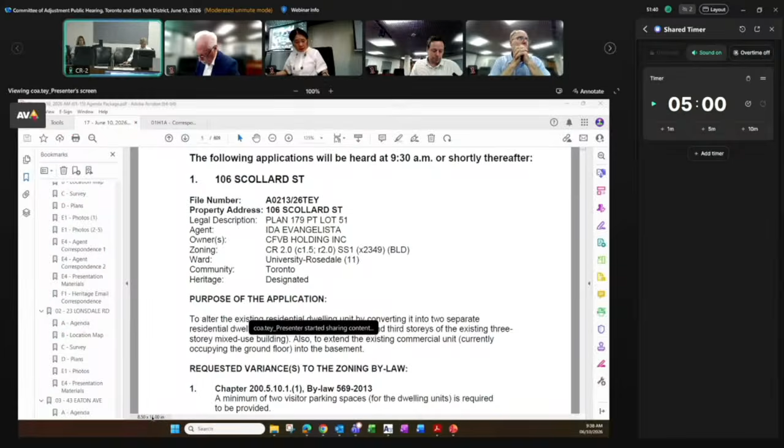106 Scollard Street. This is to alter an existing residential dwelling by converting it into 2 separate residential dwelling units, which will occupy the second and third story of the existing 3-story mixed-use building. Also to extend the existing commercial unit on the ground floor into the basement. We received a copy of survey, site plan, floor plans, elevations, 5 photographs, and email correspondence from the agent, and presentation material from the agent. We also received comments from heritage planning and transportation engineering. This is all the material we have received.

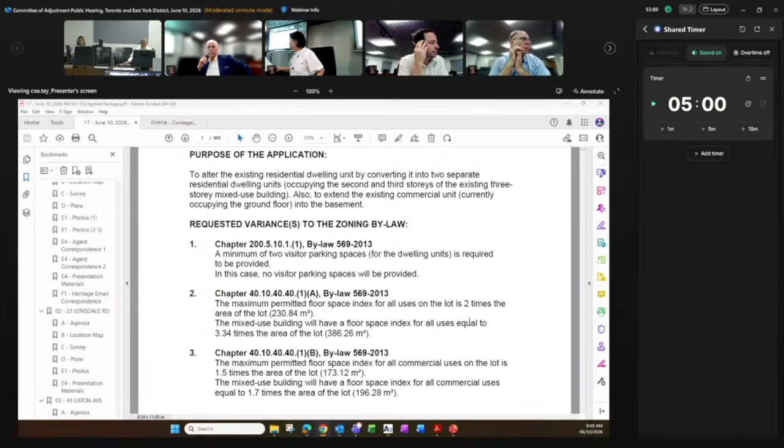We are ready for the applicant or the agent, please. Item number 1. Through you, Madam Chair, we have the agent online, but we lost him. I'll try reaching out to the agent again. You try one more time, otherwise we'll move on. I think it's a woman, Miss Ida Evangelista. We'll try one more time, and then we'll move to the next item.

Please leave your name and number after the tone, and I will call you as soon as possible.

We're going to move to item number 2, which is 23 Lonsdale. The purpose of this application is to alter the existing 2-story semi-detached dwelling by constructing a front 2-story addition above the existing garage, and also to replace the existing rear deck with a new covered deck and stairs, including new stairs for the basement walkout.

We received a survey, site plan, floor plan, elevations, 5 photographs, and also presentation material. We have no comment from any other sources. Okay, we are ready for the applicant.

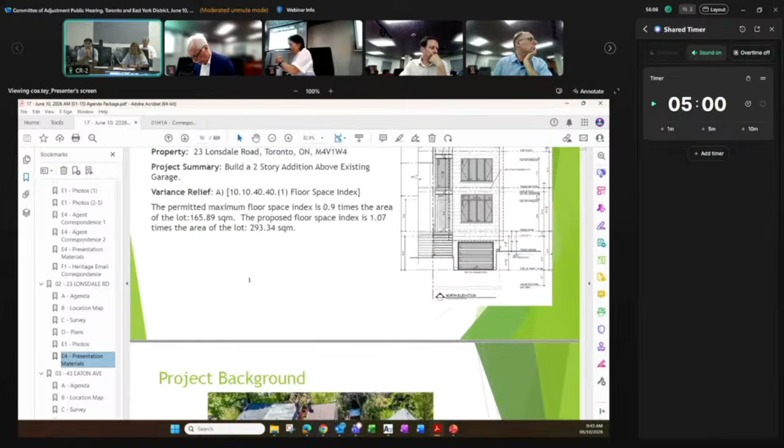In your presentation material, slide number 4, you show a graphic showing next door, the attached semi. Is that simply done to show symmetry? Correct, because my neighbor is building also the same 2-story addition above the garage. So I just want to say that I'm keeping the line the same.

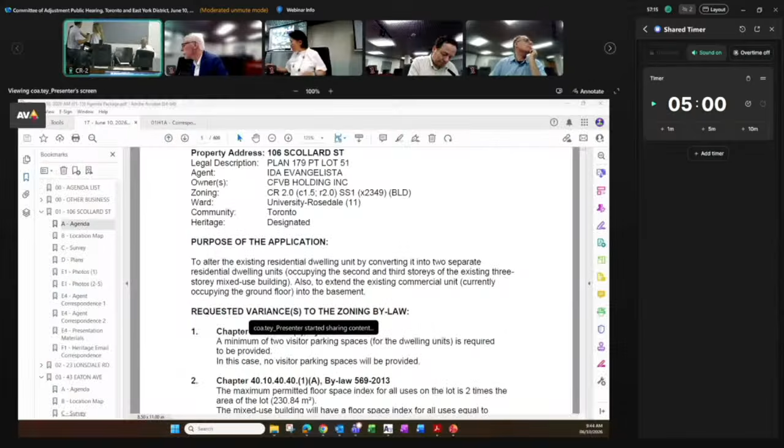106 Scollard Street, yeah. Ida, you have been unmuted. Thank you, good morning Madam Chair, members. My apologies, my computer just decided to crash on me. So it happens, we understand. Okay, so we are ready for you.

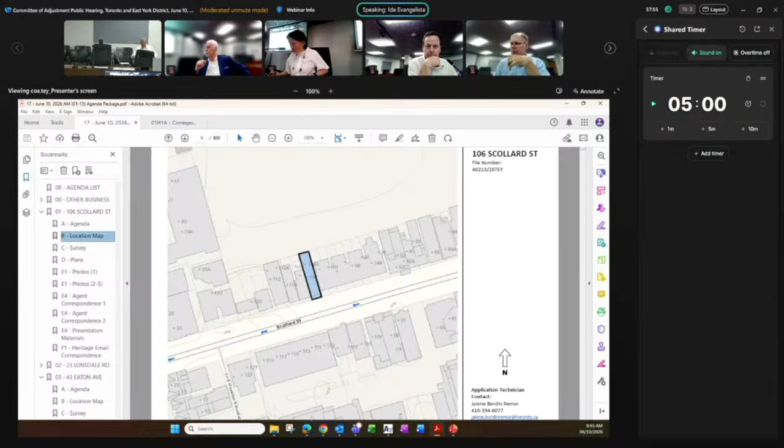Please tell us your application. Give us your address, name and address please. Absolutely, Madam Chair. Ida Evangelista, 53 Bentworth Avenue, Toronto. Okay, thank you. And I'm here on behalf of the owners of 106 Scollard Street.

Yeah, and I do not believe there's any opposition. So do you want to address the panel for any other issues before? Do we need a presentation? No? We might have questions. Do you mind if we just move into questions?

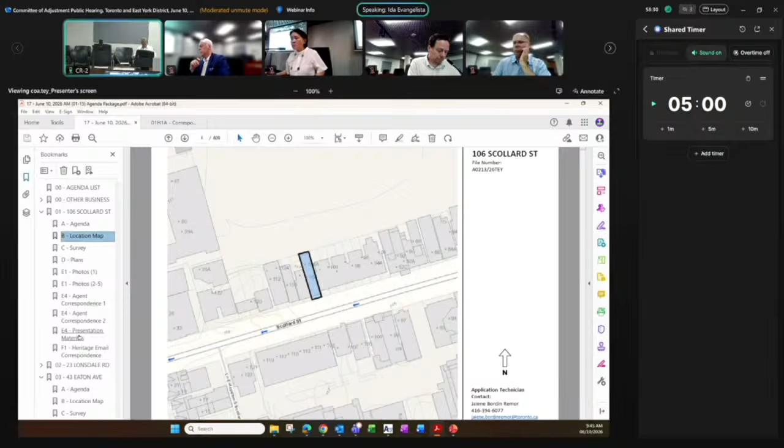Yeah, this is very straightforward. There was a fire next door, from, I believe, 92 to 104 caught fire. The structure remains as is, but due to water damage, we've had to gut the interior of 106, but I'm open to any questions that you may have.

Yes, we do have a question here. Mr. Weed, yeah. Just a minor question of clarification. At the end of the plans, the four plans labeled A2,

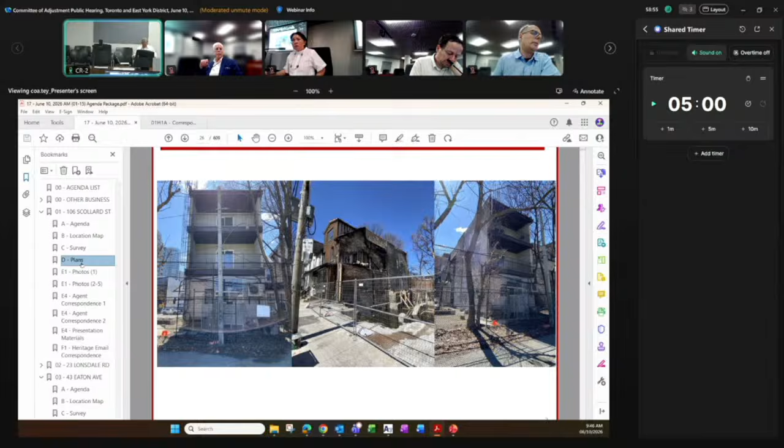they seem to indicate a single unit, but I'm assuming that's a superseded plan and we're going with the ones that are earlier on in the presentation. Is that correct? Through you, Madam Chair, member, the plans from A2 are old plans dating back to 2001. It wasn't quite clear, the application wasn't quite clear to some staff, so they asked if we can include some of the older plans. But the newer plans are from 411 to, I believe, 414. I just wanted to make sure that was clarified before we go forward. Thanks, okay.

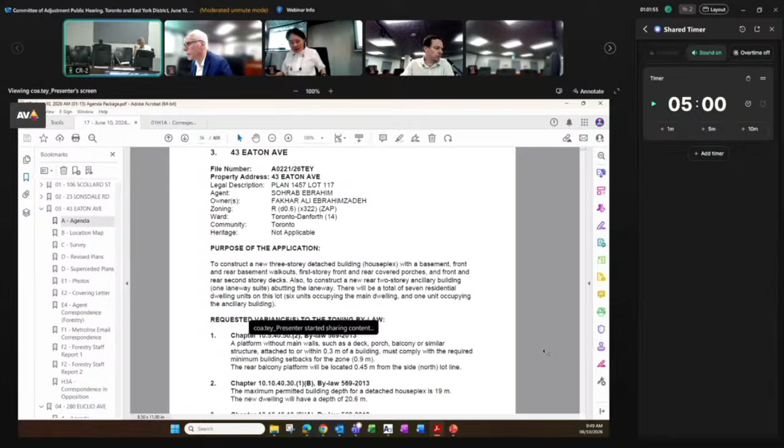Item number 3 is 43 Eaton Avenue. This is to construct a new 3-story detached dwelling, which is a houseplex with a basement, front and rear basement walkouts, and first floor front and rear covered porches, and front and rear second-story deck, and also to construct a new 2-story ancillary building, which is going to be a laneway suite. There will be a total of 7 residential dwelling units on this lot, 6 in the main building and 1 in the ancillary building.

We have received a copy of survey site plan, floor plans, elevations, and revised site plan, floor plan, and elevations, and 5 photographs and cover letter and correspondence from the agent. We also have received comments from Metrolinx and from Urban Forestry. We received opposition from 51A Eaton Avenue. And that's all the material we have received.

Thank you. Well, we're ready for the agent or the applicant. Through you, Madam Chair, we have the agent online and a couple of speakers in interest and opposition online.

Good morning, Madam Chair and members of the committee. My name is Sohrab Ebrahim from Barhouse Architects, 33 Lanark Avenue, and I'm an agent and architect for this project. I'll be happy to explain anything on the file. So do you want me to give a brief, or do you want to go ahead with some questions about it?

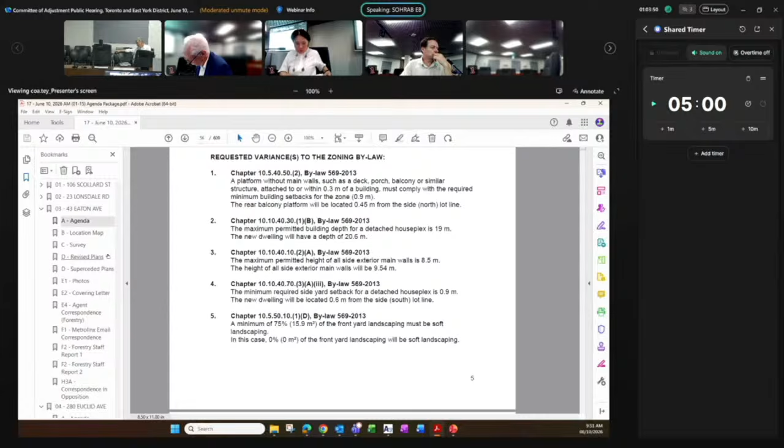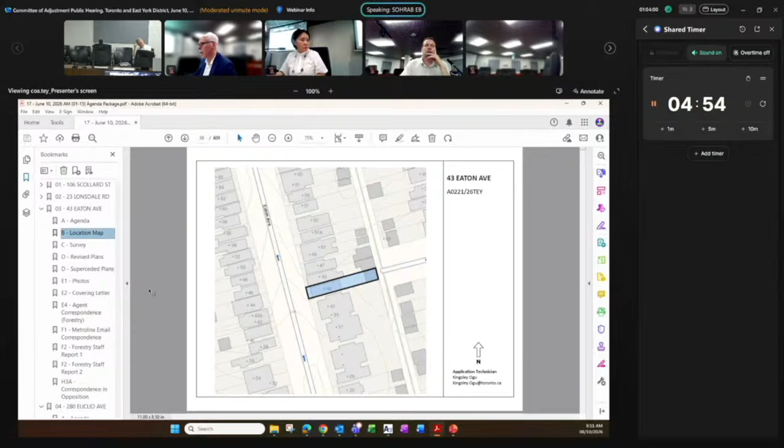So it was a very tough weekend for us because we received some surprising news that the survey was not showing the correct size of the large tree in the front. But we were able to look into it and communicate with the forestry. Unfortunately, we missed the deadline to submit the new drawings and proposals. But I have confirmation from the owner to confirm some of the improved numbers. And the good news is that we were able to improve the design totally in all aspects, including the front yard, the length of the building, and the backyard.

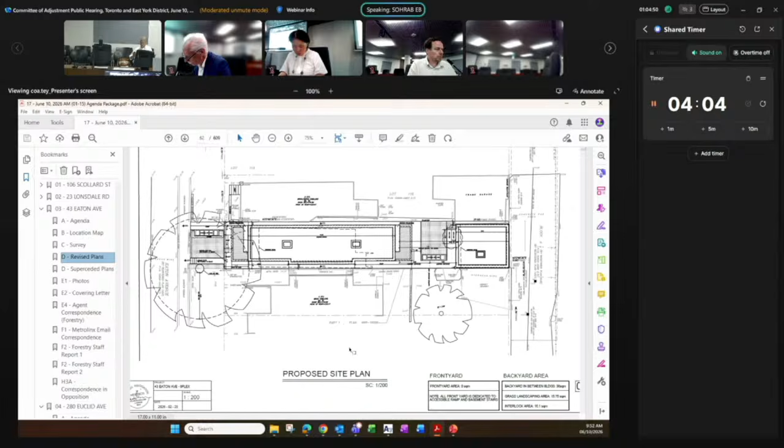So the number one change in this project is that we have reduced the number of units for the sixplex in the front from 6 to 4. So now we have only 4 units in the building sitting in the front. That gives us the opportunity to shrink the size of the basement units and the upper floor units as well. These are not totally connected with each other, so it's really tricky, and we have several options to play with, but we need to go one step at a time for each option.

So basically, the first impact of reducing the number of units is that we will not need the space occupied in the front yard for the garbage bins. Can you go back to the previous slide that shows... now go down to the one that... Yep, so this is the current basement.

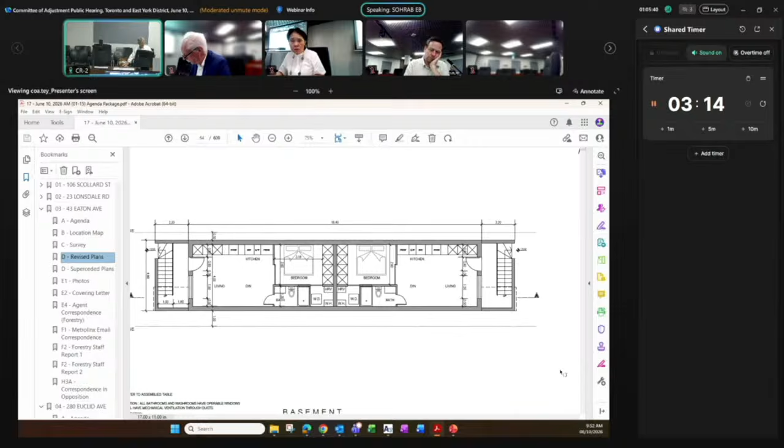What we are changing after the committee is that we are switching to a 2-bedroom unit here. We will shrink the walkout in the backyard. That will give us plenty of additional green space for the backyard. And if you please go to the site plan as well, and zoom into the front yard, please.

So you see the dedicated space for the garbage bins on the left side. We are able to remove that from the design because we have a dedicated space in the backyard, which is sufficient for supporting a total of 5 units now instead of 7 units. That will add green space to the front yard. The existing front yard landscaping is not much different, honestly, from what we have proposed here.

But we are looking into options to increase the landscaping in the front yard. The minimum that I can confirm in this session is a 0.6 meter shift back of the building, so we will have more front setback in the improved building design. That will add additional space in our front yard. As you see, the current proposed front yard is all taken up by pathways, and they're fully functional. We didn't have any space left named as front yard, so we were lacking some green space there.

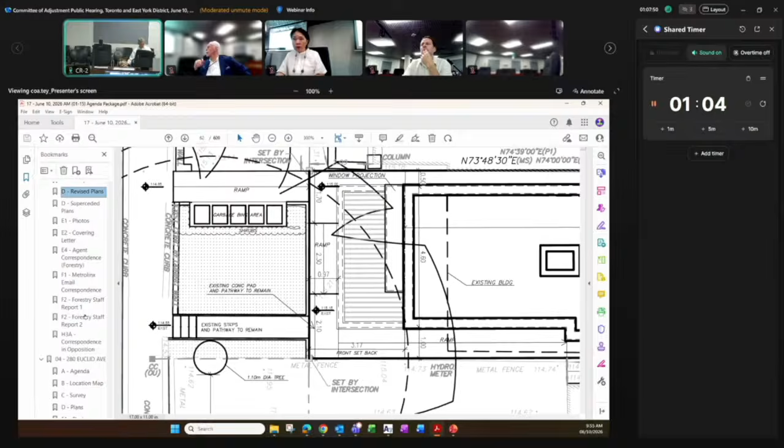Okay, you said one more minute. Do you? That's it, you're done.

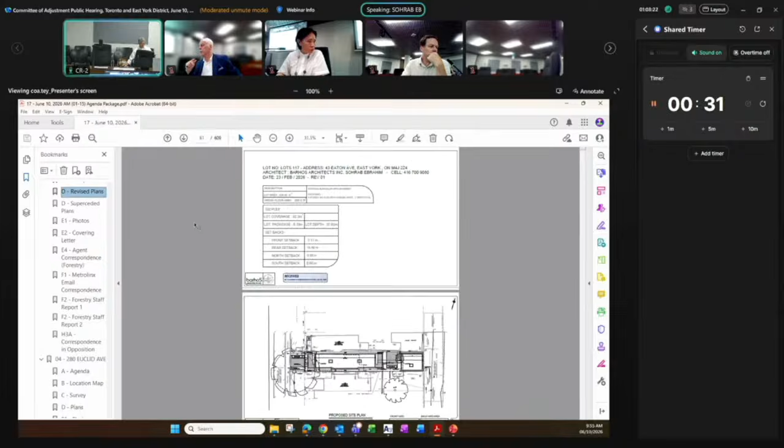One quick item about the back lane unit - we tried to push it to the limits of the property, but Toronto Hydro wasn't able to provide a power upgrade from the front yard. They're going to provide it from the back lane instead. So we're taking as much as possible for now, but we know later on we'll need to dedicate something as a trench going to hydro. That's why we're pushing everything to the site limits.

Okay, thank you. Before we start, any questions - I'd like to know, are you going to revise the purpose clause since you're reducing the number of units?

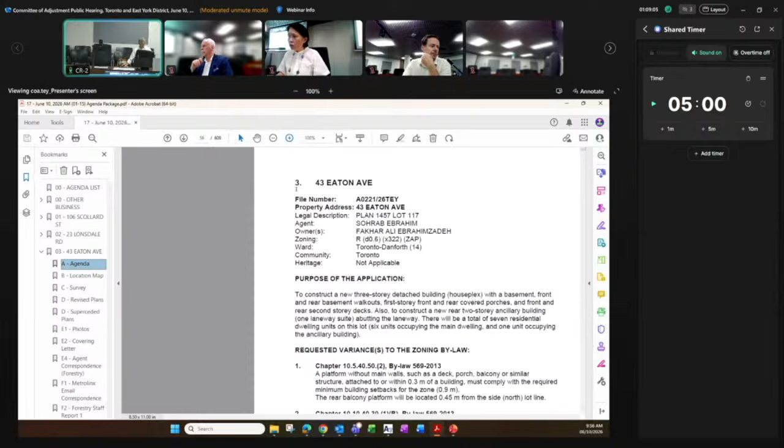Yes, we are reducing the number of units from total 7 to 5. Four will be in the main building and one in the auxiliary building. The purpose clause will be revised to reflect a total of 5 units.

The second question before we start - are all these changes reflected on the revised plans in terms of building envelope and setbacks?

We missed the submission deadline last week, so it wasn't submitted to the committee. But the building envelope and all the setbacks shown on this site plan are accurate - the current site setbacks will remain the same.

Okay, another question - you said you've removed or relocated the garbage bin locations, but the current site plan still shows one at the City Boulevard and some in the backyard. Will that change any of the variances in front of us? Not really - it improves the landscaping in front. The one currently shown is the backyard garbage area, which remains and is sufficient to service 5 units.

Okay, but will this affect the rear yard soft landscape variance? We will improve it - the basement walkout will be reduced by 0.8 meters, and that will be added to the landscaping in the backyard.

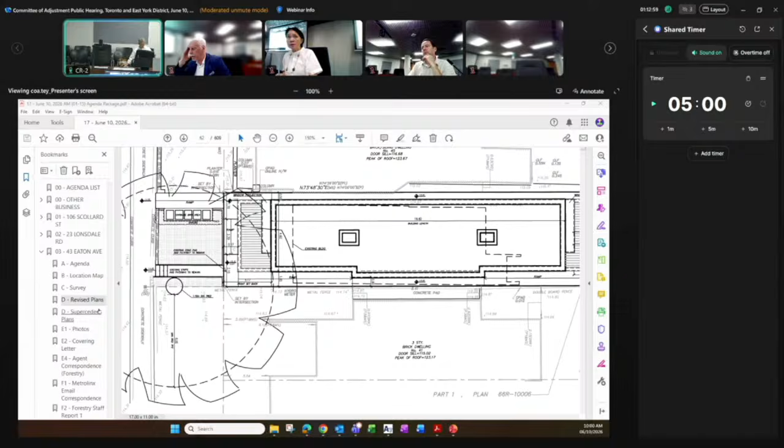I'm uncomfortable looking at the proposed plan, which is not the most recent site plan and elevation drawing. So let's give it to questions for the applicant. One last question - are you aware that Urban Forestry has recommended refusal of variance number 5?

Yes, and we send them the updated drawing. Item number 5 is regarding the landscaping in the front yard. The landscaping hasn't changed much from the existing. If you see the survey, the front yard is all covered with concrete pads, so we haven't changed much, maybe a bit. All the proposed areas are fully functional - it's nothing to do with aesthetics of the building. There were some ramps and concrete paths. If you check the survey, you'll see the existing front yard is mostly covered with concrete. Yes, I was out to the site, I know what it looks like in the front.

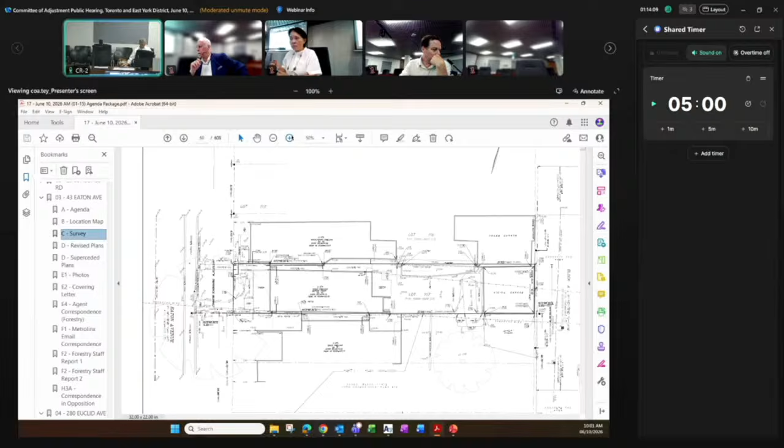Okay, thank you Madam Chair. Thank you, yeah please. I'll save my comments for when we're in committee. When we're in committee, wait till we comment. Okay, questions? Peter, any questions?

No, just similar to Dino's point. It seems like some of these variances are going to change, and we don't know the numbers yet. So to the applicant, if they can give us the actual numbers of the changes to the variances before we hear from the neighbors. Just like what I asked about the soft landscaping, I think it's good to have a number, because otherwise they will revert to this 17%.

Okay, let's have a discussion, and then we go back to the applicant with our decision, whether to defer or whether to go ahead.

I think from the perspective of transparency and accountability, I echo what Mr. Lombardi said - I'm not comfortable with this. I don't have the right numbers in front of me, I find it to be confusing. I actually agreed with Forestry's recommendation. I also saw the initial proposal as zero sum - yes, we'll get increased density, but having zero soft landscaping weighs one against the other. Moreover, the lack of transparency here, I'm just not comfortable with. So I would not support this, or I would support a deferral.

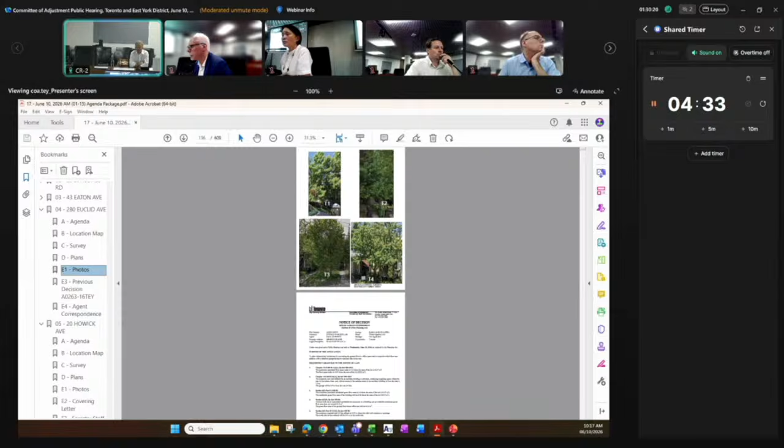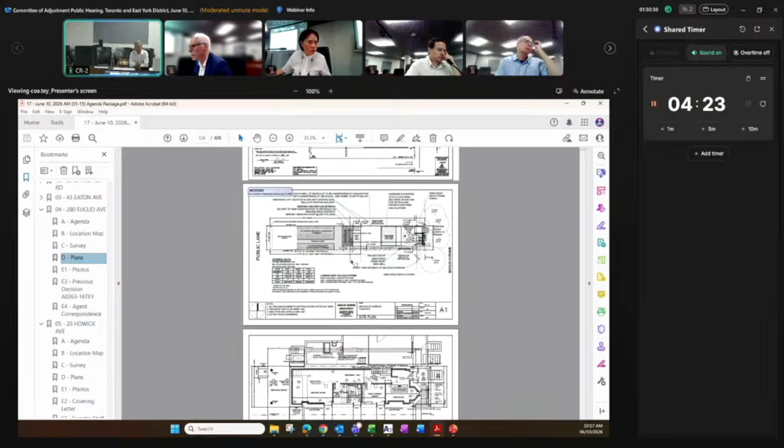So this is around Bathurst and College, Bathurst and Dundas. These are very tight, old properties, narrow frontages. So in coming for the minor variances to rebuild the front porch, 2 variances are triggered by that activity. One is a kind of somewhat complicated front yard setback exemption - that means if you can meet the side yard setback, you can project a front porch into the front yard setback a certain amount. But because this detached house has a 0 lot setback, any projection cannot take advantage of that provision, so that is variance 1. The second one is pretty easy to figure out: on this tight little property, the existing deck takes up almost all of the front yard, so the new deck, by adding a building code compliant stairway to the basement, reduces the front yard soft landscaping.

And in fact, the plan examiner stated it as 0, which I'm fine with. But on my drawings, I indicate that there's 1.2 square meters, like a little wafer of grass could be left. So she may have... I never really questioned how they calculate their numbers, so I just took it as the 0 she assigned. I'm happy to answer any questions.

As far as I knew this morning on the AIC, there were no staff comments from planning or even forestry. There are no neighbors so far.

There's one person who may be of some interest, but I don't know whether this person is going to speak or not. Is he going to? Yeah, hi there, can you hear me? Okay, so there's a speaker. Are you finished? Yeah, that's my presentation. We'll hear what he said, and then we'll get back to you. For sure. Okay, we're ready.

Madam Chair, we'll now hear from our next speaker from 278 Euclid Avenue.

Hi folks, my name is Ben Atkinson. I'm at 278, the property just south of 280. Just for general context, we have a good relationship with the neighbors, everything's generally fine, and we're supportive of the project. We've been away for a little while and just came back and saw the changes.

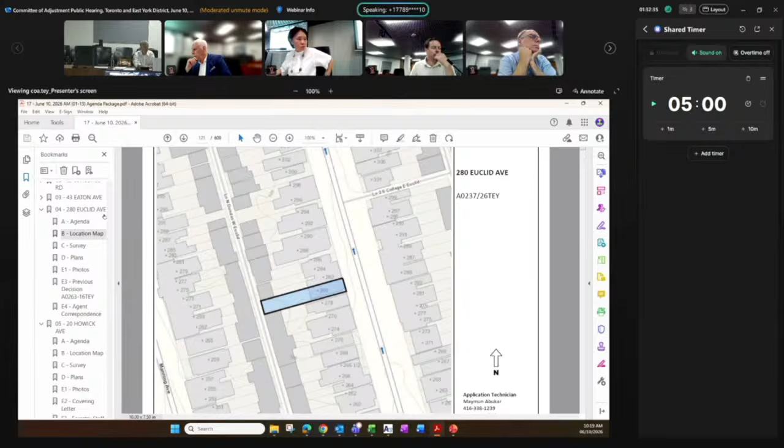I just had some clarity questions more than anything else. Angus, I think you already answered one of them - the variance for the 0% soft landscaping on the front yard was a little scary to us. We had some water start coming into our basement, whether related or unrelated, around the same time the project started next door. So any reduction in the soft landscaping in the front was a little unnerving to us. Good to hear that it sounds like there's still going to be quite a bit there.

We'd love to hear a little more about where the walkout is going to come, which direction it's going, and how much change there really is to the front. And then there's the first variance on it - again, not really in opposition, just looking for clarity. Is the front porch coming out any closer to the road, or is it just effectively rebuilding what it was?

It doesn't seem that they are doing anything in the front, but we can ask the question - the applicant can respond to that. Any question to this speaker?

Actually, I do have a question to you. Are you aware that they are proposing a rooftop rear deck? My question is, is that a very common feature we're aware of? Because we can see it, yeah. Yeah, it's a common feature in the area, right?

From what I can see, limited to what I can see off ours, there are a number of patios. This one looks like it's probably on the larger side in the neighborhood, but people build off the back - it's not the only one, there are a few of them. Not every house has that, but it's not an unusual feature, right? That's what I want to make sure. Yeah, no, I'd agree with that. This one maybe looks a little larger, but I'd agree.

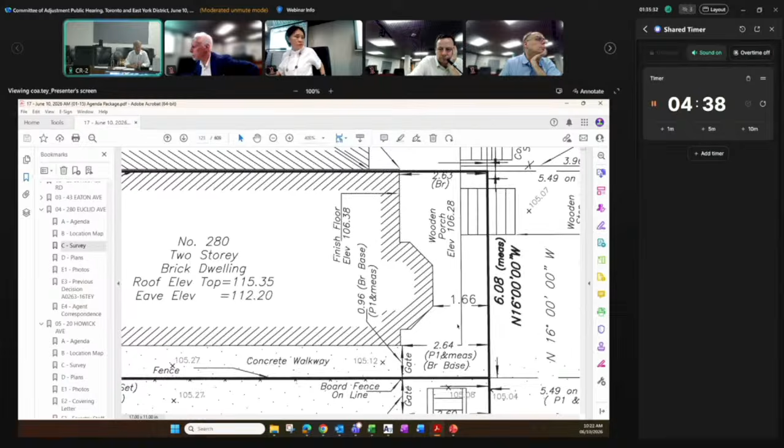A building permit was issued over a year ago for the rest of the project, including third floor decks and rear additions. There were no minor variances needed for that work. We're simply here for the porch. So to answer the neighbor's question, the porch is being taken down and rebuilt.

It's slightly closer to the street, maybe by about a foot than it is right now. These are difficult things to explain over an image and a phone call. I'd be happy to come by and walk them through it. I'll talk about the soft landscaping using the survey, and then show where the stairs come up.

As you can see, the dark line on that survey illustrates the property lines relative to the building. The building has that hatching on it. You see the bay window and the little steps coming down off the existing porch. Like all these properties, the owner of this property owns that much land, but in front of their property, between their property and the sidewalk, is a swath of right-of-way owned by the city that is green landscape space. That's why when you walk on these streets, the porches are pretty much right on the property line at the front, if not over, and then it's the city land that you think is actually the property's front yard, but it's not.

So in other words, that's a city-owned tree floating out in the boulevard there. Forestry's had no concerns about this because the porch is effectively being rebuilt in its same location. So in terms of the ability of the land, both on the property and in front of the property, to absorb rainwater, there's effectively no change. There's been a porch there for 100 and however many years, 40 years at this point probably, and the soft boulevard of the city is not being altered in any way because that's not our property. So that's the issue about the landscaping change.

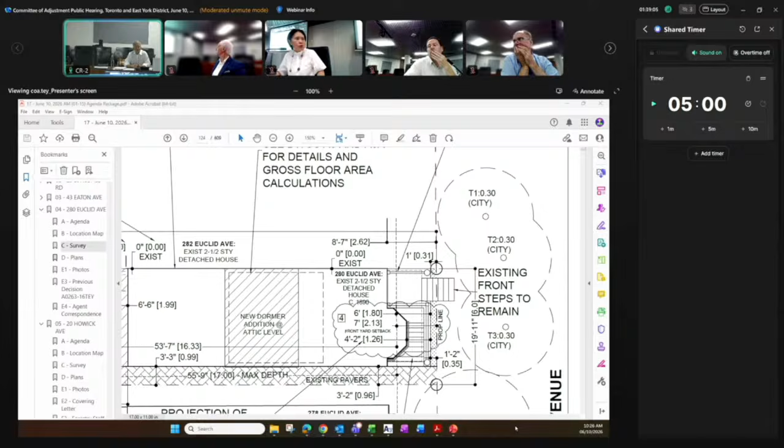So I'm going back to the rooftop deck. Is there any kind of concern about privacy? You're only proposing a guard, right? You're not proposing any higher fence. No, because this is the R zone, you're not limited to deck size in the R zone at all. I think about overlook. I guess the owners have lived there for many years, and it was chosen to simply put the deck up there with a normal building code compliant guardrail.

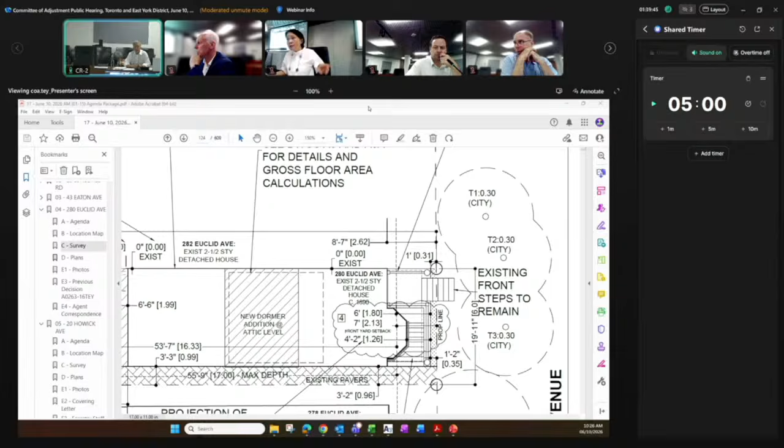And again, as I say, that permit was issued long ago. Okay. Any more questions? Now we don't have any more questions, no more speakers either. So we are back in committee now. Okay, please, Mr. Lombardi.

Thank you, Madam Chair. I think the applicant, Mr. Skeen, has done a good job explaining the two variances and how those variances translate to the site plan. My initial concern was with variance number 2, which reduces the requirement for front yard soft landscaping to 0. But in reality, as Mr. Skeen explained, there really is not much room between the front of the house and the front property line.

I don't see any opportunity to add additional soft landscaping, but there is landscaping in the boulevard. This is Little Italy neighborhood, an eclectic neighborhood with tight side yard setbacks and urban form. I think this is a modest application, and while many houses along this street have reduced soft yard landscaping in the front yard, I think it's consistent with what's existing on the street.

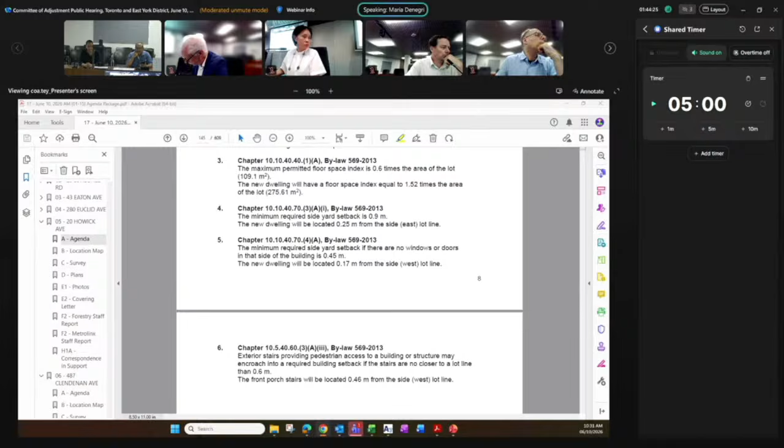The depth variance is really just because it's set back from neighbors, yes. I don't know if any of you had an opportunity to visit the site, but we can see from the plans, the existing house is a one-story shack really that has been set back excessively. So what we've done, our addition, though it's called a rear addition, is actually a front addition. We are building on the existing foundations and extending the house forward to better improve the streetscape.

I wanted to ask, would you be okay, because the rear sticks out quite far from the neighbors, and I really appreciate that you've got the third floor set back a little bit. Would you be okay if we tied the approval to the elevations just to lock in that setback? Yes, I think that's a thoughtful element, but I just want to lock that in. Okay, maybe we can hold our question. Let's listen to the people who are here first.

Please give us your name and address and tell us what. Yes, my name is Jorge Guajala. I'm the owner of 22 HOWICK Avenue in Toronto. Thank you for the opportunity to speak today. I'm here to express my concerns regarding the proposed redevelopment of 20 HOWICK Avenue, which is adjacent to my property on the east side. My home is located immediately on the west of the proposed development. Along the side of my house facing the proposed construction, I have 5 windows that provide natural light and ventilation to my home. The proposed 3-story dwelling is planned to be built extremely close to the shared property line, which raises several concerns regarding both the enjoyment and maintenance of my property.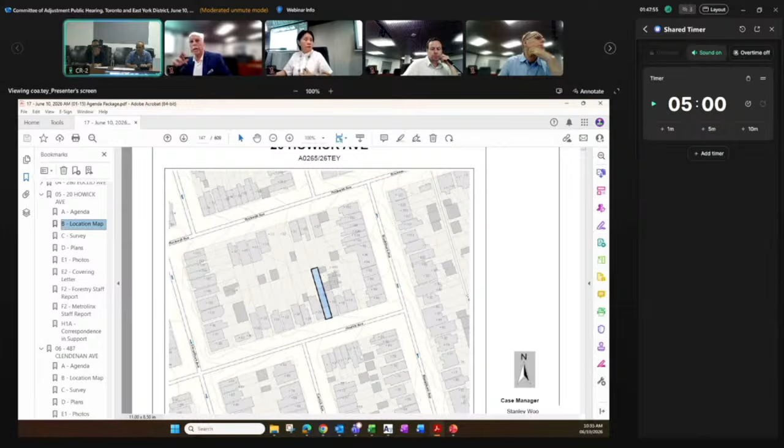Especially George Wahala, okay, thank you. Yeah, we do have some questions for you. Please go ahead. Thank you, Madam Chair. To the deputant, thank you for being here today, sir. Just a couple of questions.

Are you aware that the proposed renovation to the house, a rebuild, is using the existing foundation? Yes, I'm very aware of that. Okay, so they're not changing those setbacks?

According to the blueprints, the plans that I have, they plan to do 5 centimeters from the property line. This old house has been built for 80, 90 years. Back then they built it so close. Actually, number 20 is built about 4.5 inches from the property line, and so is my house, about 7 inches. So total is maybe 12.

I've been having a hard time using that little space to go into the backyard. I had to crawl, go sideways. And the proposal there, they want to continue almost flush to the foundation, which will leave me with the same tunnel view. All I'm asking is for zero setback change.

Sorry sir, I just asked a question if you're aware that they're using the foundation. Yes, I did, I am. And are you aware also that the depth at 21.12 meters is existing? So what I was saying is the bench.

The 4 feet, I'm happy that they're doing something to the house, it's beautiful, it's going to look good. My only concern is— No, you're not answering, you're just not confirming. Do you understand that the depth is existing? They're not changing the depth.

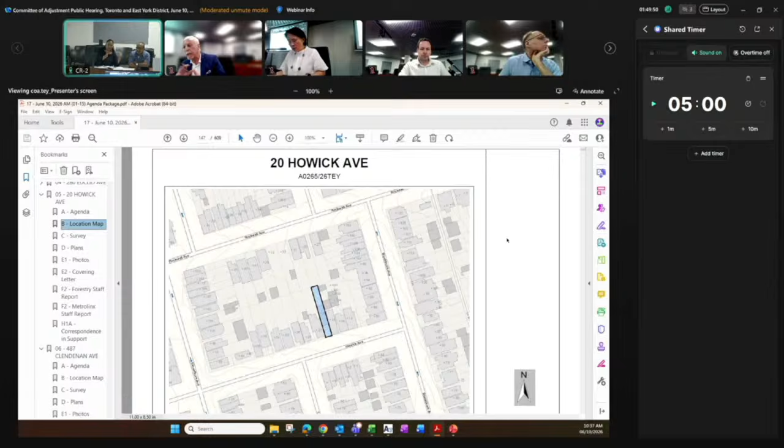The other question I have, you talk about the west side yard setback at 0.45 meters. You may not know that recently the provincial government has allowed a reduction in all setbacks to a lot line by 10%. So in fact, 0.45 meters would now be 0.405 meters. Not a big difference, but it is a difference. It's bigger than 0.17.

Okay, thank you. Any other more questions to these speakers? Okay, thank you. We don't have any more questions. No, I have a question.

No, okay, the house is made out of bricks, right? That foundation, but the deck is made out of wood and it's huge. Is that part of the foundation or not? We can get the agent to address that, because it's just our order. Otherwise, we are now bringing back the applicant and maybe address some of the issues that you just raised.

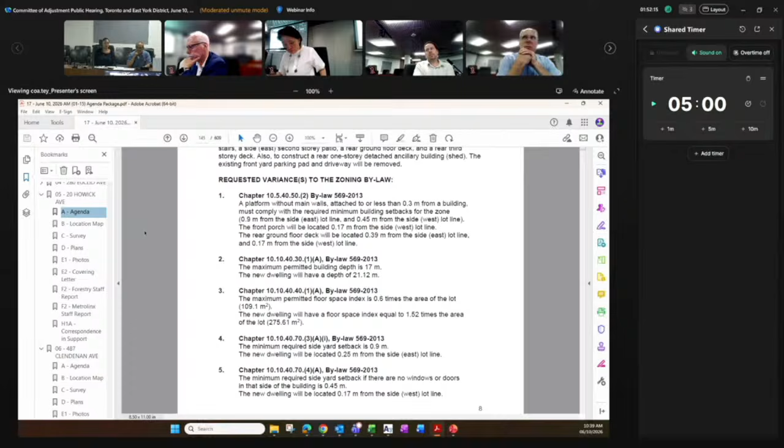Hello, can you hear me? Yes. So in terms of the full presentation, what I would be doing is essentially going through the points in my cover letter, which was submitted, and I believe all committee members have had a chance to read.

So what my cover letter does is essentially state the intent of the homeowners to build a house, a new build from the ground up, by using the existing foundations, which has been made quite clear. It is the use of the existing foundations that helps us address the complexity of building on a tight infill site.

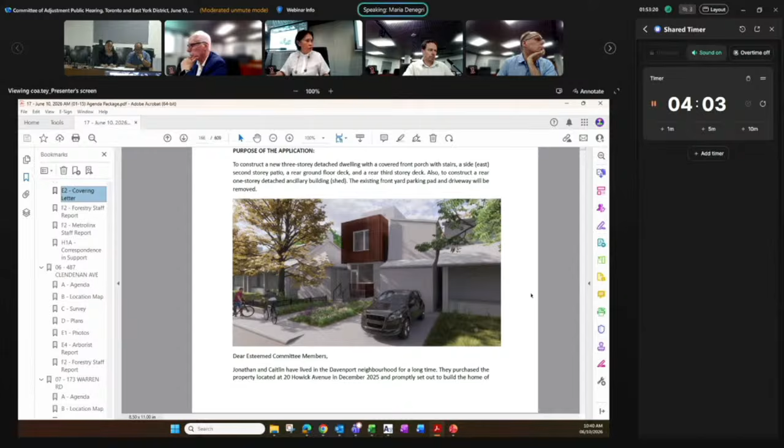It essentially generates a series of existing variances. To address the concerns of the setbacks, the house does extend the existing foundation walls forward. On the west side, which is the setback in question, we are extending an existing condition. On the east side, the existing condition is actually 0.25 meters.

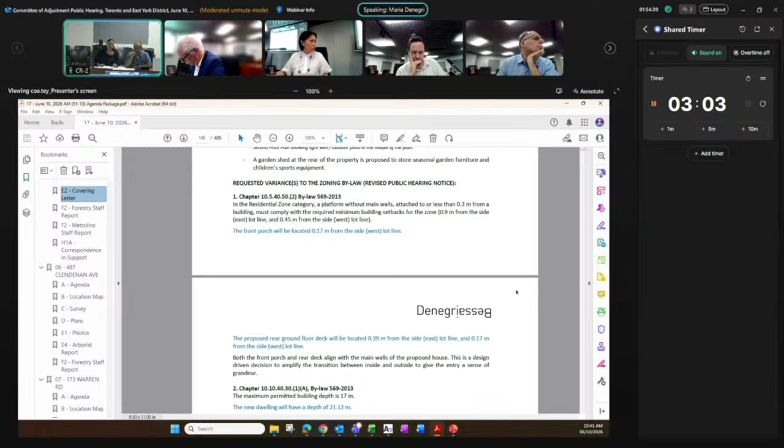But we have noticed there is a right-of-way of 0.3, so in our new build portion we actually comply with the right-of-way. Now, to answer the neighbor's question regarding the deck: no, the building depth is measured to the wall of the building, not to a platform without walls. So the deck is not part of the building depth calculation.

It extends beyond that. I think the concern about the setback has to do with the blocking of light. A platform at ground level, 18 inches off the ground, is not going to block any light on the neighboring property. If there are concerns about the depth, we could reduce the depth of that deck to get the homeowners down to the yard faster. But the rear deck is not a variance, so it's not one of the items listed here.

There is a screening wall on the west side of our porch. We could also remove that in order to allow a little bit more light to filter onto the neighbor's south wall.

But the other thing to note is, yes, all the houses on the street, most of them precede zoning bylaws. So the house next to us was built prior to zoning. There are windows on his side wall, but those windows today would not be allowed. So we don't really have anywhere to go other than up and extend the existing walls.

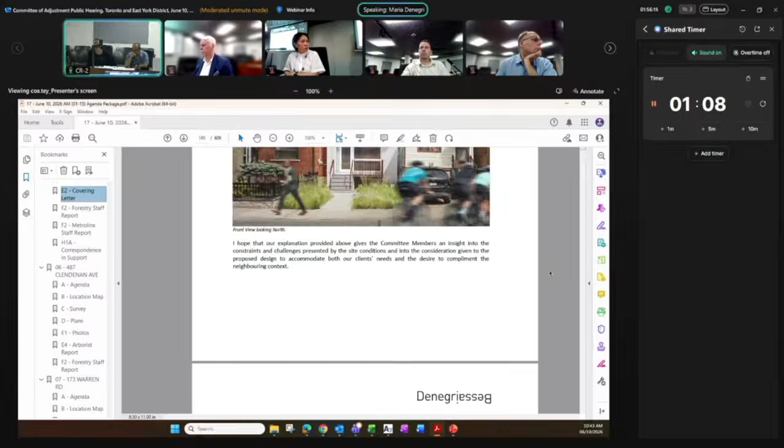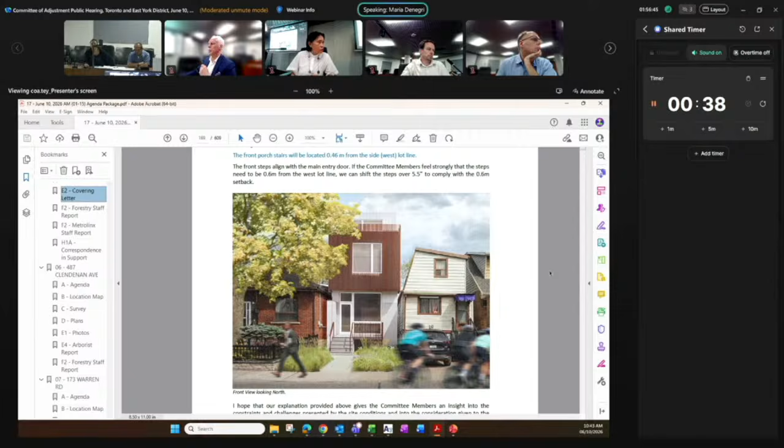The site is narrow, it poses challenges. I'm excited about the opportunity the owners have given me to resolve the challenge of building a family home on a narrow property. I think we've done so in a creative way, really trying to address the scale of the neighborhood by setting that third floor back considerably, so that from the street, the massing reads as 2 stories. I'll leave it at that — I'm sure there may be more questions I'm happy to answer.

Any questions? Yes, please. Just confirming, so even though you are building a front addition, you're still not going as far forward as the neighboring houses, right? So there's no breach of front yard setback, nothing.

Thanks. Yeah, the building depth is actually increased quite a lot, it's over — almost 4 meters over. But I have a question: looking at the site plan, you said you're using the existing foundation. It seems the front porch frame is actually slightly smaller than what you suggest.

I'm talking strictly about whether the foundation is a full foundation you can actually build on, or if it's just this frame part you'd have to rebuild with new foundations. The front deck is being removed — that front deck is not buildable. When I talk about existing foundations, I'm referring to the existing house, which has a masonry block foundation.

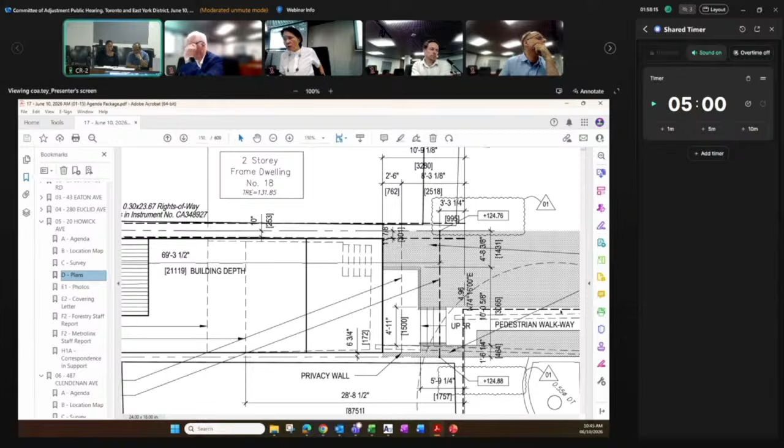Oh, so which — it is at the back? I think the front part is where the issue is. If you scroll the site plan on the screen, you'll see the notes with those arrowheads.

Yes, and that's what I see. I understand that part, but I think the issue was in the front. I was confused that you can actually build on top of that. You can't build on that deck, that frame foundation.

So the large wood frame deck in front of the house gets removed. The one-story construction above grade gets removed. We will be reinforcing the foundation wall with a bond beam around the perimeter and then building on top.

So it seems that the clearance between your house or proposed part and the neighbor to the north is about 20 inches, right? Like 10 inches from your side, 10 inches. So is that a safe width so no one will get stuck? I guess it is the existing width too, right? It is an existing width.

I have tried to take the narrowness of the property and set the house in. I'm also dealing with building code requirements, which is not something you consider in the context of committee of adjustment, but I have a minimum width of a staircase, a minimum width of a hallway, minimum dimensions required for bedrooms. And all of this combined.

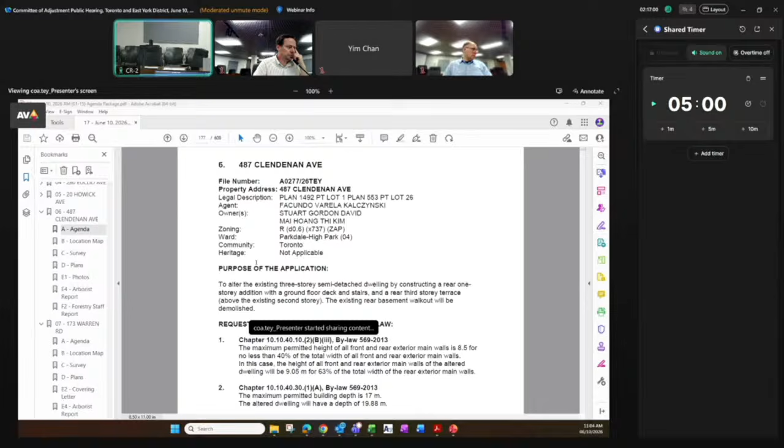As we resume, okay, the next item, item 6, is 487 Clendenan Avenue. This is to alter an existing 3-story semi-detached dwelling by constructing a rear 1-story addition with a ground floor deck and stairs and a rear 3rd floor terrace. The existing rear basement walkout will be demolished. We received a survey, site plan, floor plan, elevations, 4 photographs, and an arborist report from the agent.

We also received comment from Urban Forestry and one form of support from 489 Clendenan Avenue—it seems to be the next door neighbor. Okay, they're asking for just 2 variances. We are ready for the agent or the applicant. To you, Madam Chair, we have the agent online and no speakers for this item. Okay.

Hello, Madam Chair, my name is Facundo Varela, 103 The Queensway, Toronto, Ontario. Okay, yeah, I correct myself—they are seeking 3 variances. 3 variances, yeah, correct? Yes. Yeah, it seems that you do not have any oppositions.

I see our panel did a presentation. No, we do not need a presentation, but we do have questions. Please go ahead. One question to the applicant: are you providing privacy screening for the third-story terrace?

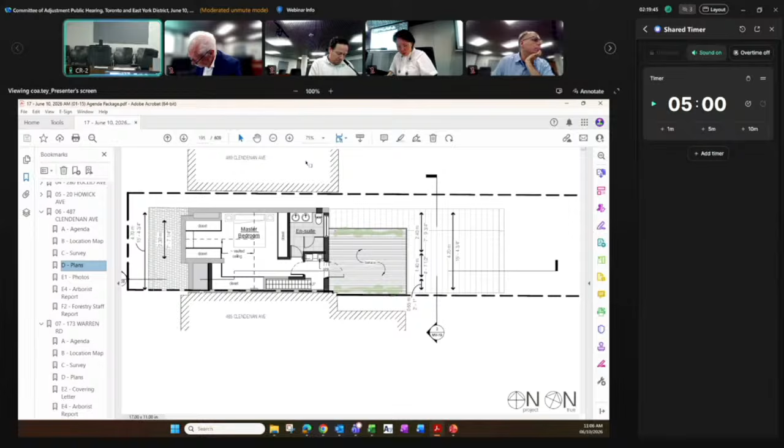Thanks, Chair. I think this is reasonable. The depth is significant compared to the neighbors, a couple meters in addition to what's permitted, but this is an extremely long lot. The backyard is over 120 feet deep, and they've sloped the roof nicely, so it has less impact on both neighbors. It's also limited to 1 story in height, which is an important element to lessen the impact of the depth variance.

The other variances being requested are minor, I believe. So I'm happy to move approval of this.

I'd like to tie it to the side elevations, both sides, and the site plan, just to capture the 1-story nature of that. Actually, let's say all elevations, because that'll capture the roof peak as well. And subject to the privacy screening we just discussed, and urban forestry condition 2.

There are 3 conditions. Who would like to second? All in favor? Unanimously approved, with 3 conditions. Thank you very much. The next item is item 7, 173 Warren Road.

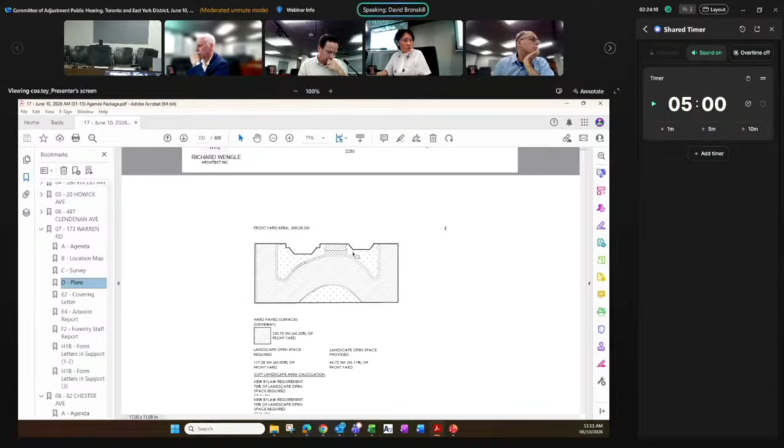Maybe the easiest way to demonstrate that is in the package we put together, the 8-page PDF showing the proposed changes in the front elevation, on the last page. Part of the genesis of this application is a change in... sorry, do you have our presentation there? I don't see it in our package, but maybe staff will have it. Let me try it a different way with the materials you have, to avoid taking too much time. I'm just seeing if there's an existing elevation I can show you.

The existing building on elevation 3, Madam Chair, really does appear as a 2.5-story. Part of this application is a change in architectural style to a Tudor style, and the front elevation has the sloped roof and dormers. The peak you see there in the elevation on the screen is being added as part of this process. So it's fair to say the existing is a 2.5-story, and with the 3-story addition it will ultimately be a 3-story house. It does help, yes, and the existing house is actually quite beautiful, but I see it's a Tudor style architectural design.

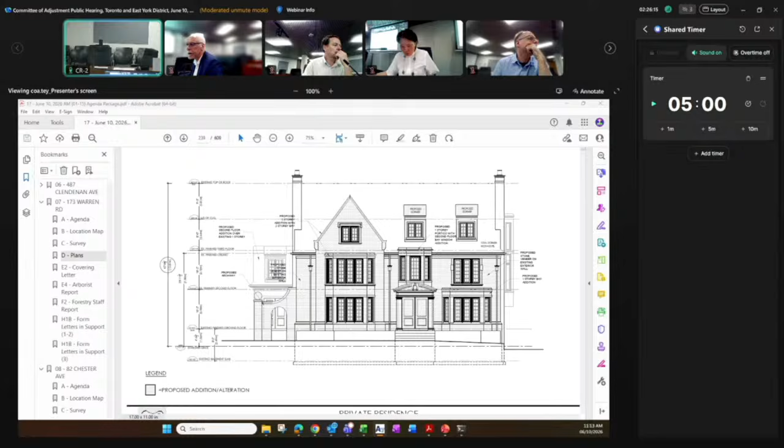All right, just another question. The variances that are troubling me are really 7 and 8. I think I understand why there are variances for both front yard and front yard soft landscaping. Can you explain, though, is that a result of the bay windows, the porch, et cetera?

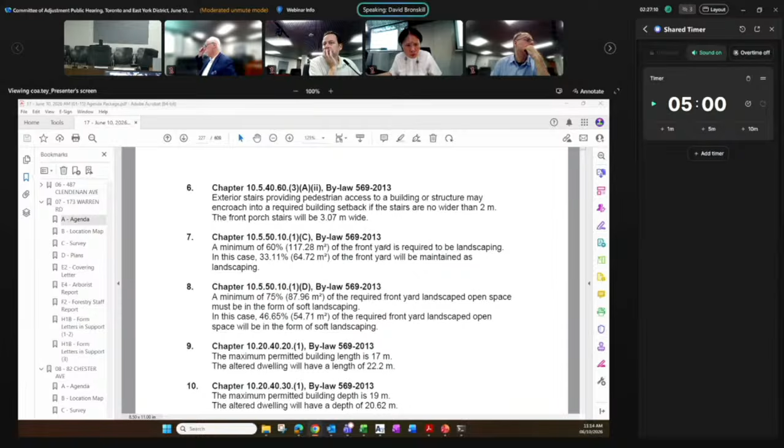Yeah, I can. Thank you, through you, Madam Chair. Those variances are actually the existing condition. No changes are proposed to the existing driveway area, the existing hard surfaces, or the existing front porch stair. However, because there are proposed changes to the front elevation, like the porticos being replaced, the bay windows, those then trigger the variances for that existing condition.

So what is there will stay the same, but the changes to the front elevation mean that variances 7 and 8 were added through the zoning examiner's process to be put in front of you. Okay, thank you. But you say that the part of existing is already under the required? Yes, those variances there, those percentages, that's what exists on the site today. Oh, okay. The bay window will not affect or take away some of this soft landscaping? Because it just triggers the variances themselves, but doesn't make the existing condition any worse. Because the bay windows do not have foundations, is that right? Correct.

All right, please, yeah. Just following up on that, I mean, there is a lot of driveway on this property. In the survey, it says that this bit at the north was a driveway. Is that already being converted, or is it being converted into more of a soft landscape area?

Through Madam Chair, I hate to ask a question of a question. Do you mean the area adjacent to the side? Yeah, exactly, that kind of leads to behind that little front wall of the extension of the house, on the north side. Let me just pull something up. Yeah, on the north side, it seems to be like, in the survey, that was a driveway too, but is that already being converted or is it planned to be converted? There's an archway that's proposed there.

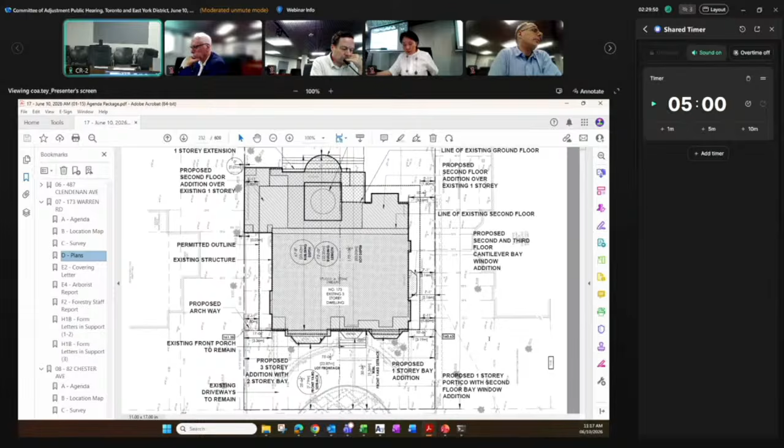I'm trying to see if perhaps, despite the enormous amount of driveway, some driveway is being removed elsewhere on the property, that's perhaps a compensation. I acknowledge that is occurring. Thank you for the question. Yes, okay, I can see whether it can increase some of that. So some of that's going to be now more of a walkway with some soft landscaping. Correct. Because it's a very good site and very large, and it should have some kind of opportunity to not make it worse in terms of soft landscaping. I thought, yeah, you're right.

Yeah, okay, all right, any other questions please? Maybe Mr. Bosco can advise the owner to improve that, reduce the size of the driveway or eliminate it and put it into a little walkway so it got more soft landscaping. Indeed, unless they want to park a car there. Well, they may be planning to do that.

So we do not have any more questions. We are in committee now.

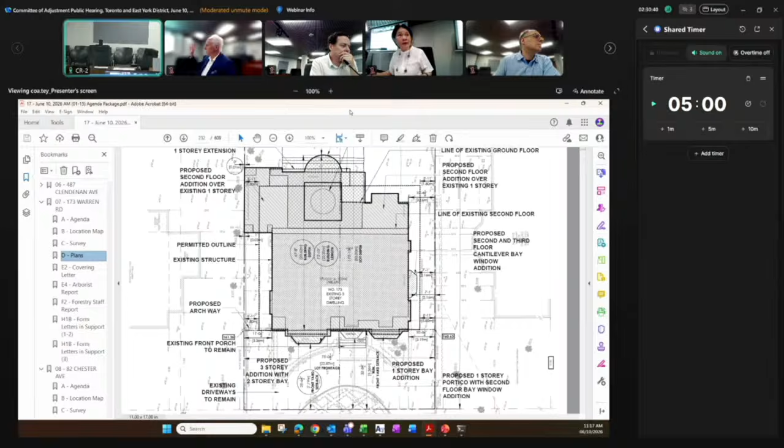Please, yeah, go ahead. Thank you, Madam Chair. Yeah, this is generally the Forest Hill neighborhood, the properties are significantly large, the homes generally are larger in size. I think this is an appropriate renovation of the existing residential dwelling. I understand the explanation for the reason for variance 7 and 8. I'm satisfied with that explanation.

I do thank the applicant for providing a neighborhood character assessment, in the sense of providing previous committee of adjustment approvals for similar variances as those being proposed. I think it's an appropriate redevelopment, alteration of the property. I think it respects the existing physical character of the neighborhood. It fits, and I believe that the 4 statutory tests are met.

And I would move a motion approving the application, granting the 10 variances subject to urban forestry condition number 2. Do you want to tie it to the side elevation to show that the addition is where the height is, because it's a very specific step? Yeah, I can add that to my motion, the 2 side elevations. I think that's good. All right.

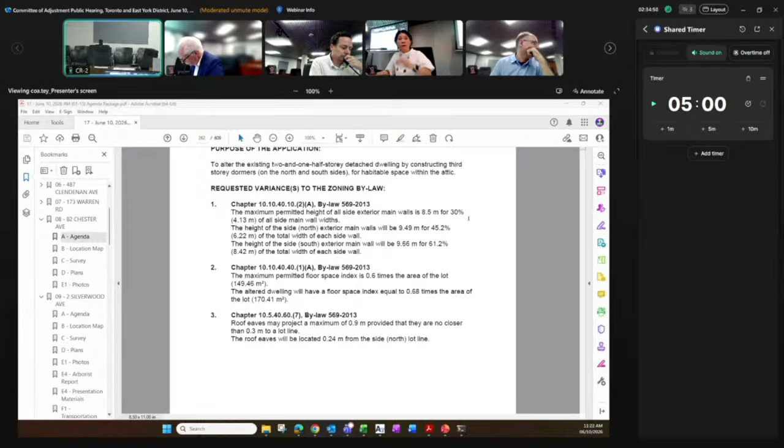Okay, very good. Do we have questions for him? They don't even have questions for you. It seems that we understood everything you have submitted. So we are in committee now. I think this is very simple, and I think it's appropriate.

So I'm happy to put a motion forward to approve the variances with no conditions. Yes, Peter, second. With no condition, all in favor? Approved unanimously. Thank you.

Item number 9 is 2 Silverwood Avenue. This is to construct a new 3-story detached dwelling, because more than 50% of the wall will be removed, with an integral garage in the front, a front covered porch with stair, a rear ground floor deck with canopy, and a rear third floor balcony, and a modified L-shaped driveway which will reduce the width of the existing oversized driveway from Spadina Road. The committee also received a survey, site plan, floor plan, elevations, 10 photographs, and an arborist report.

Presentation material was provided from the agent. We received comments from transportation, engineering, and also a staff report from urban forestry. They're seeking 8 variances. Okay, we are ready for the agent, please.

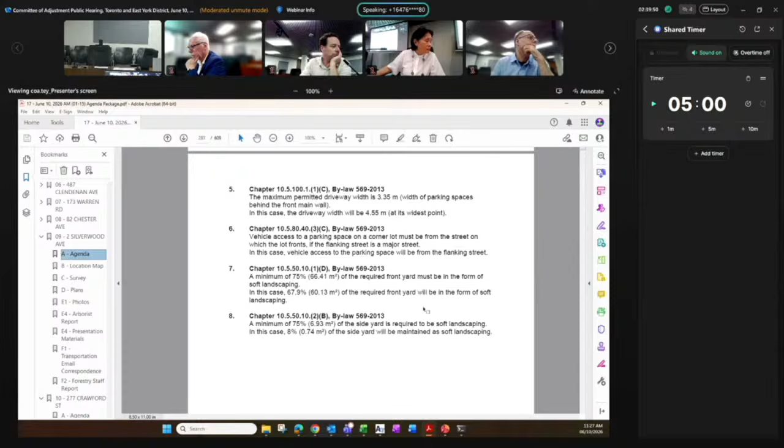On that side you'll see a walkway which is existing. Beyond the property line to the east there's a hedge, shown in the pictures I've submitted, in addition to a right-of-way which is grass as well. From a separation distance, from a greenery perspective, you won't notice it. It's an existing condition, and that's also a function of where the property line is.

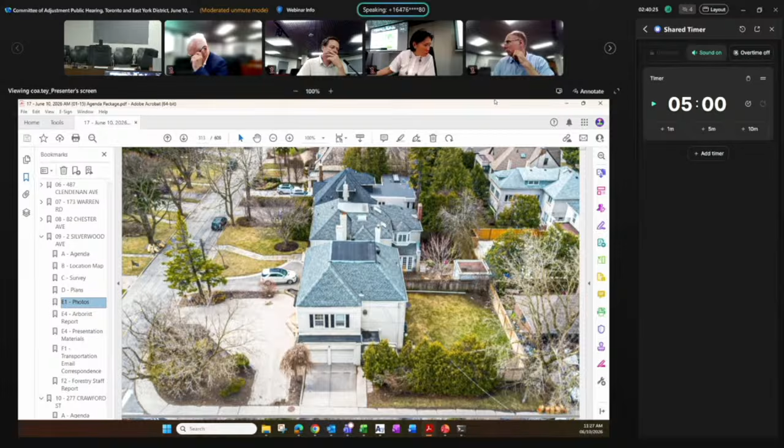Correct, it's probably much more visible from beside the garage there. There's shrubs and trees on the city right-of-way that will be maintained and remain. And you'll note there's a walkway leading to the back, which is existing and reflective of the proposed plans.

Question on your site plan: you say the driveway is modified. What does that mean—are you just changing the width, or repaving the whole thing? You'll see in that picture, the majority of the front yard is hardscape, which is the driveway. On the site plan, it shows the driveway being reduced in width within the property. The area highlighted in purple is the existing driveway, and underneath that is the proposed driveway, which is significantly less pavement.

And you'll also note that the soft landscaping gets larger. Yes, the existing soft landscaping on the property is approximately 25%, and we're proposing 67.9, or 68%, soft landscaping. So the greenery and landscaping increases as a result.

I can see the dotted line is the existing. What I'm trying to get at is it seems on your site plan you're going to have to repave the whole new driveway anyway, right? You're not just going to patch it up—it will be completely dug up. Yes, that's why there may be an opportunity here.

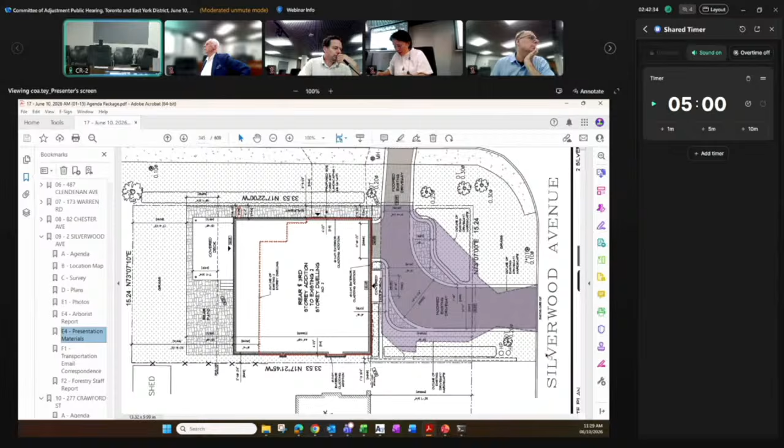Thank you, any other questions? No, we do not have any more questions for you. We are in committee now.

I'm happy to move a motion to approve this. A lot of these, especially the side yard variances, are basically existing conditions. Honestly, this is an enormous improvement on the property—much less driveway, the garage is being moved to a less prominent place off the side, and the third floor that's being added is set back a bit so the massing is mitigated. I think it's a really thoughtful proposal and an enormous improvement overall.

So I am happy to move a motion to approve these variances with forestry conditions 1 and 3, and with a condition that the new driveway be paved with permeable pavers. I also think it's important to tie it to the site plan, since it shows more landscaping and all that.

I think the variance already structures that, right? The variances—I'm not too sure, because they do have a lot more improvement in terms of... Well, the variance requires them to have at least 67% soft landscaping, but we can tie it to the site plan, I'm not too bothered. Oh okay, it was tied to the site plan anyway, right? So, okay.

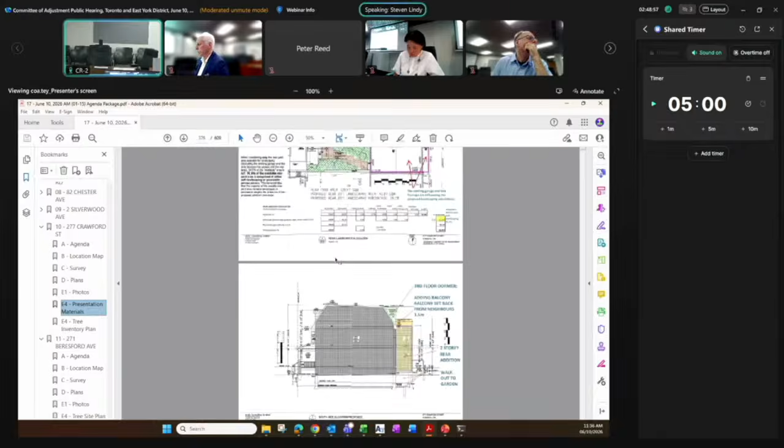Okay, thank you. Maybe there's some kind of thing they can take out from the area, I don't know. The 29.3% will not be a problem - that's what it is on the notice on the agenda, so you can't go below that. All right, thank you, and any other questions? It's a good point though.

Any other questions? So we do not have any more questions for you. So we are in committee - so we're going to stick with the 29.3, right? Yeah, please, Peter.

Thanks, Chair. I think this is a good application. I know the rear yard soft landscaping appears low, but I think anytime you have a garage in the backyard, it's so hard to even get close, right? I think what they've shown in their landscaping plan is kind of best efforts - the actual paved area is pretty restrained, and they're showing it as porous pavers, which goes a long way. And the other variance is just FSI, which has little impact at all. So I think it's an approvable plan, and we should tie it to the site plan to secure the porous pavers.

Yes, the site plan. Okay, Madam Chair? I'll support that, but can we put a note in our decision that porous pavers or interlock or permeable pavers are not considered soft landscaping any longer by the City of Toronto? They are not, we never do. Well, they were considered previously, but a recent report has said they can no longer be considered part of soft landscape - it's been that way for a while, but that's why sometimes we ask for it just to compensate the lack of landscape.

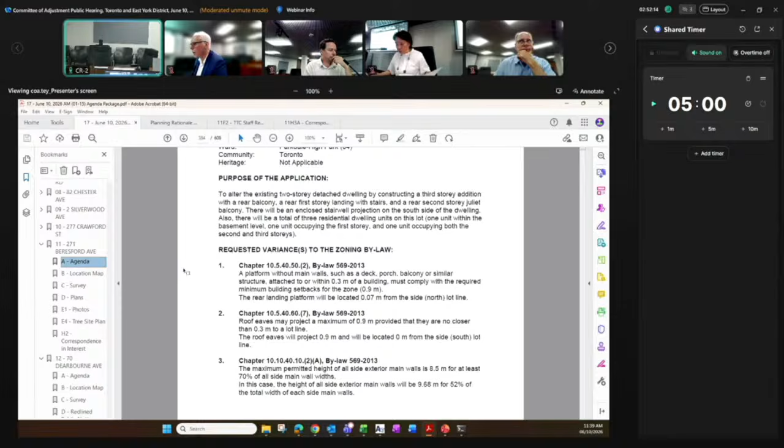Good morning, Madam Chair and members of the committee. My name is Sava Miokovic. I live close by at 92 DeForest Road. I'm actually a family friend of the property owners, but also their agent.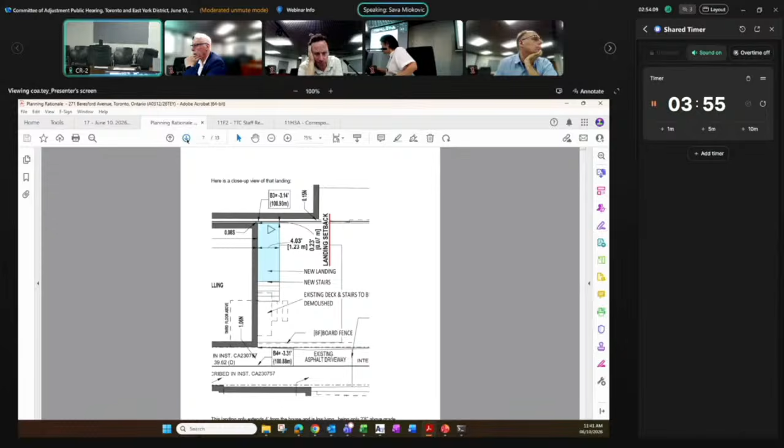Next is the eave setback, if you can go to page 8. I want to clarify that this variance only applies to that little portion of roof above the extended side bay window, the little red line you see there. The existing roof overhang is a 0-inch setback, so when we extend this up, we trigger the exact same variance. It's basically an existing non-conforming condition, but this variance is also minor in nature.

Next, if we can go to page 10, I'd like to speak to the 3rd and final variance, the top of main wall height. I want to clarify that the variance is specifically the top of main wall height of the side walls. On this slide you can see that red line, that's the allowable top of main wall height of 8.5 meters. Our proposed sidewall top of main wall height is 9.6 meters.

This variance is minor for the following reasons. First, it's only 1.18 meters greater than allowed, so a very small request, and it's also localized, only applying to the rear half of the house. Secondly, the overall building height is compliant, 11 meters is allowed for overall building height, and we have 9.8 meters, so the overall house is compliant with the top of building height.

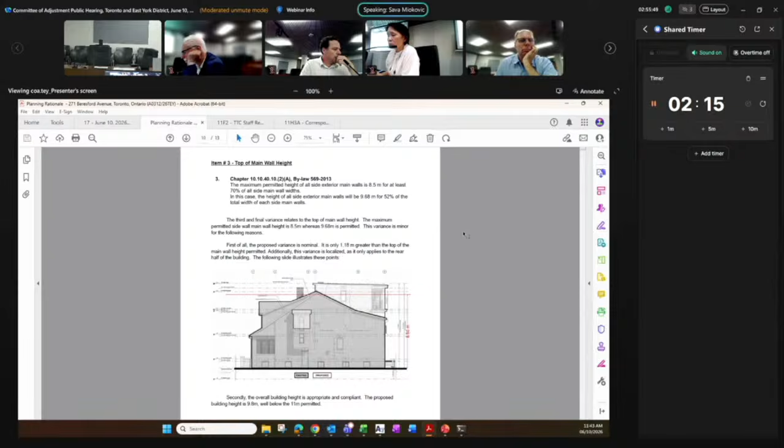Thirdly, the impact on the neighboring properties is very nominal. The reason being there isn't much exposure or visibility of that side main wall, because the neighboring homes actually extend further into the backyard, 3.6 meters further than our house and our back wall, so you won't really see it since you don't have a good angle to it. Lastly, if you go to page 5, I want to point out the effort made to maintain the low-lying existing house at the front. We've intentionally placed the addition at the back, behind the existing roof ridge, to conceal it as best we can and maintain the existing streetscape. For all those reasons, I think that 3rd variance is also minor in nature, and the building massing is appropriate.

Let me speak about the neighbors next. We've consulted our neighbors and received their support, including Mike and Trish, who are immediately to the south with the shared driveway.

What number is that? Number 269. Okay, that's right. The neighbor directly to the north, number 273, who submitted the letter of interest.

We have her support as well. We had a meeting to discuss how the rainwater runoff would be handled, and such. So we have Van's support as well, number 273.

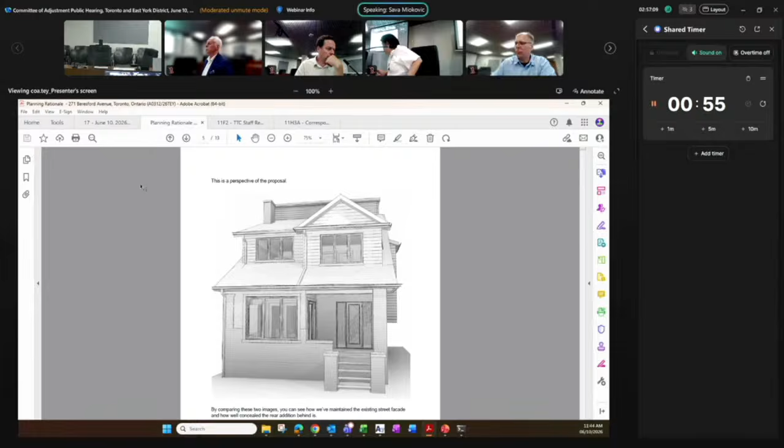And then directly across the street, Diane and Michael spoke with number 272 and 276, and they both provided their support as well. I'll leave my comments on the letter of objection from the Swansea Ratepayers Association for my rebuttal, unless you want me to speak to that now. No, we will listen to them first.

Thank you. We did not have the information of the supports here. Thank you for letting us know that. Yeah, so we have the addresses, those four. It's kind of just a neighborhood feel, so they didn't feel it was necessary to submit it in writing, but we have verbal support.

And I saw the staff report from the TTC. I used to hang out in that basement when I was a teenager, so I do recall hearing the subway go by when we were hanging out down in there. But we will submit the adjacent development application to the TTC for their review, so no problem with that.

And to conclude, I think the proposed variances are all minor in nature. I think the proposed development is appropriate. It's keeping with the general character of the neighborhood. It's in line with the city's initiative to increase density in neighborhoods. And the proposed work will be welcomed by the neighborhood, and it will revitalize this classic but aging home. For these reasons, I ask the committee grant us the requested minor variances.

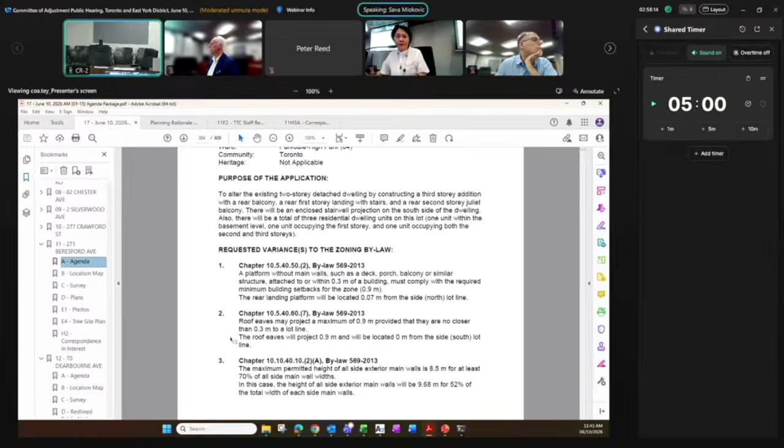Thank you very much. Your five minutes is up. Oh, sorry, thank you. So we'll listen to the opposition and then bring you back. Okay, sure. Nicholas, you have been unmuted.

Good morning. Yes, Nicholas Singh, Swansea Area Ratepayers. Okay, thank you. All right, so you ready for your five minutes speaking presentation? Yes, I am, Madam Chair. Okay, let's listen to your presentation. Thank you.

We note that our submission was submitted one day prior to the applicant's planning rationale document, which was received by the committee just yesterday. This raises issues about deadlines for submission of documents and the fairness of these hearings, such as what constitutes a reasonable opportunity to review and comment on a proposed development, and do applicants have advantageous deadlines for submissions. Notwithstanding all of that, in this case, the applicant had all the time they wanted to prepare their rationale, and they had only a one day opportunity to review the ratepayers' comments before submitting their planning rationale and oral presentation.

Our submission rests heavily on Section 45 and the requirement for the proposed variances to pass the test for the official plan, which it does not. The applicant's rationale makes no attempt to answer this objection. Their oral presentation also fails to address the test. The rationale focuses on only two of the tests required by Section 45, and I quote from their conclusion: the proposed development is appropriate and the proposed variances are all minor in nature. Being minor and appropriate or desirable are only two of the four tests before the application can be considered for approval.

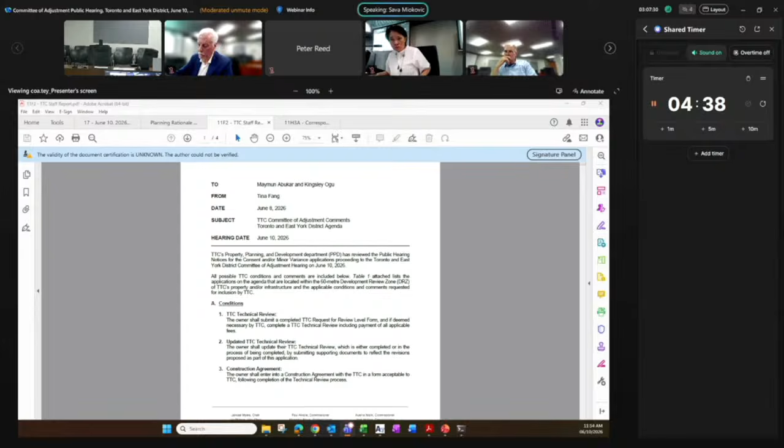To the statement that it's my duty to provide the evidence, well, not really. I'm here to kind of present an argument as to why this is an appropriate development and why the variances are minor in nature. But the committee often even tells us that we shouldn't necessarily be doing a precedent search, or that it's necessary for that to be done. So I'm just following the usual procedure there, and I leave the decision in your very capable hands.

A couple other points I want to make: the assertion that the proposal isn't consistent with the physical character of the neighborhood is, I think, outlandish. We've fully maintained the street-facing facade of the existing house in our proposal and took a lot of efforts to keep that existing character. Further to that, this house is actually the first house built on this section of Beresford Avenue, so we've definitely maintained that existing and long-standing street character.

Also, regarding the objection to this small rear landing at the back of the house, the unique circumstance of it being tucked away beside the neighbor's rear addition makes that an appropriate ask. The need to provide precedence for similar decks built in the neighborhood seems a little bit strange as well.

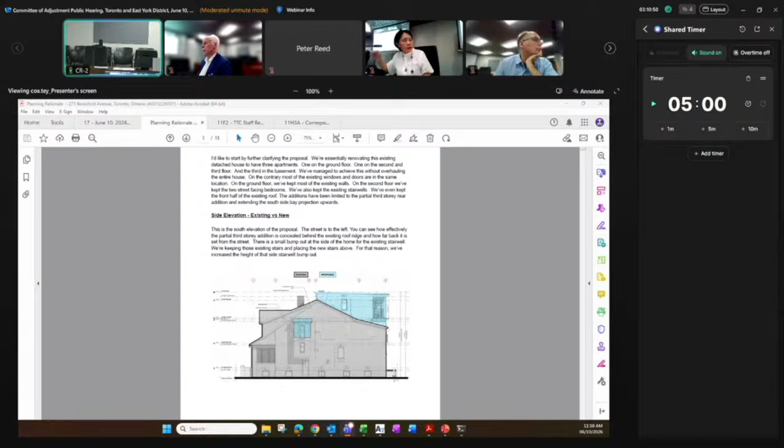Yeah, I can confirm that for you, just bear with me one second. I didn't give it much attention because, as you say, we're keeping the existing lower section of it, so it's an existing non-conforming condition and very consistent with what occurs in the neighborhood and these houses. But let me confirm that dimension. You have the section A31, but it's missing a dimension, you've shown that projection, but right, so the existing underside of that is 7 feet from grade.

Okay, and neither of these backyards that share the right of way are using their rear yards for parking, is that correct? It's quite difficult to access because they're old homes, so it's very tight. No horse and carriages anymore. Okay, thanks a lot. Yeah, no problem.

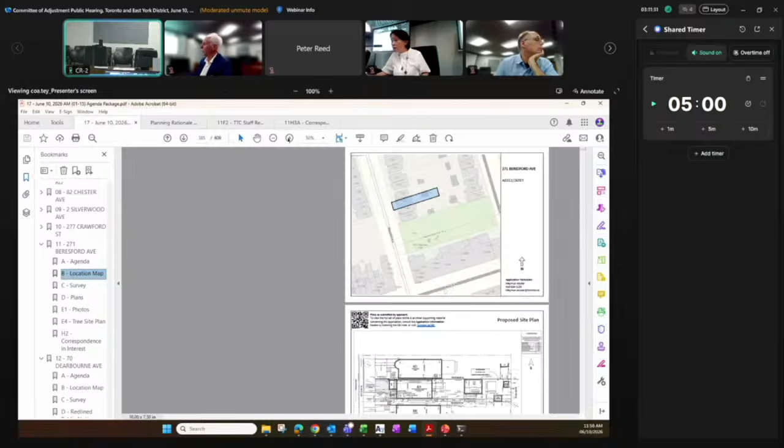I think maybe when you come to the next step, the permit process, you might have to give that very clear clearance. I think maybe you have to bump it up a little bit, 7 feet and something. But anyway, that's later. Okay, noted. Thanks. I think 7 feet is a little bit lower, maybe 7 is 21 or 2200 millimeters. But for regular passage with a vehicle, you can go lower. Anyway, he has to give that dimension when it comes to the building permit.

I know often reference is made to 2 meters as the required height for access, as it meets a typical parking space height. So we meet that 2 meters, right? 7 feet is above the 2 meters. So yeah, that's been my experience with these types, but you will sort that out.

All right, so any other questions? All right, okay, we do not have any more questions. I would like to now move to committee, who would like to start first with comments, please. Yeah, Peter, you seem to have some.

Yeah, no, I think this is a really good project. I think they've made strong efforts to retain the look and feel of the house from the front. And the variances are really quite small, I find, both in terms of value and impact. Everything is just kind of pushed up a bit at the back, but the footprint is very restrained, and I think it's a good project. I want to point out, regarding the mention of changing character in the neighborhood, that from the front, from the massing point of view, I do not see that it's an outlier.

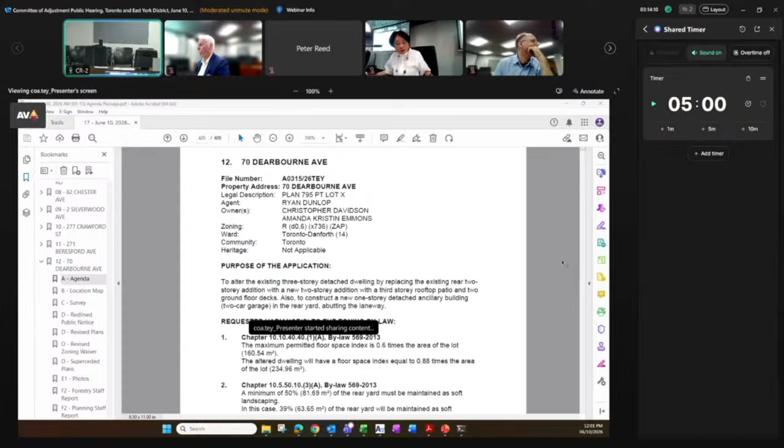We move to item 12, 70 Dearbourne Avenue. This is to alter the existing 3-story detached dwelling by replacing the existing rear 2-story addition with a new 2-story addition with a 3rd floor rooftop patio and 2 ground floor decks, and also to construct a new 1-story detached ancillary building which is going to be a 2-car garage. We received a survey, site plan, floor plan, elevation, revised site plan, a red line public notice, and a revised zoning waiver from the agent, and 4 photographs of the property.

We have received comments from community planning, tree protection, urban forestry, and also 4 letters in support from 65, 68, 72, and 74 Dearbourne Avenue. I think now they're looking for 2 variances, and there are some revisions on variance 2. Let's bring the agent or the applicant, please. Madam Chair, we have the agent online and no speakers for this. Oh, no other speakers, okay.

Good afternoon, Madam Chair. Ryan Dunlop, 600 Fleet Street. I'm the agent for the project. Okay, you have some revisions. Let's go through your revision. I want you to confirm it before we start.

So the revisions we made were in relation to item number 2, which was the rear yard soft landscaping. With some discussion with the city planner, we reduced the rear yard decks and platforms that give access down to the backyard from the main floor level. So we tightened those up to increase the soft landscaping. We went from what we previously had at 39%, and we bumped that up to 41.5%. It was just shy of about 4 or 5 square meters that we were able to squeeze out there. That was pretty much the main difference.

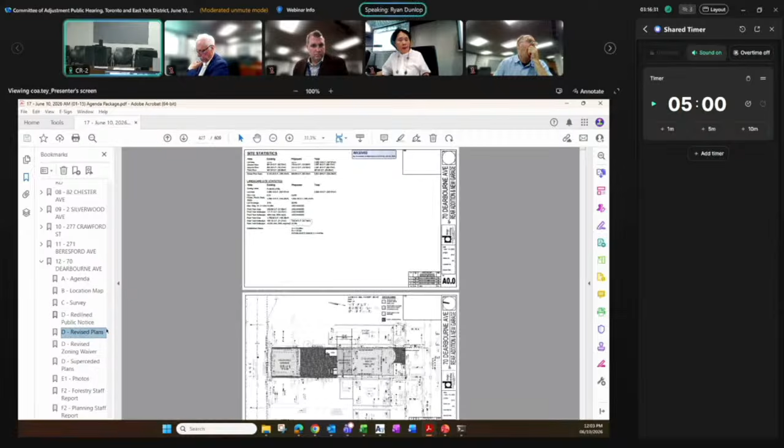And the revised plan reflects that change, right? Correct, yes. Okay, thank you. You do not have any opposition, so I'm going to see whether the panel wants a presentation. No? Okay, we do not need a presentation from you. Do you have any questions? No? It seems we do not have any questions for you either. We have reviewed all the materials, so we are ready to discuss this. Do you have anything else you want to address the panel before we start? No, I think it's pretty straightforward.

Yes, okay, well, commit it, please. Yeah, we are committed. Thank you, Madam Chair, I'll take this one. First of all, I commend the applicant for meeting with community planning and addressing some of the concerns raised regarding the rear soft landscaping. Community planning now supports the application, and there are also 4 letters of support from neighbors for this proposal. This property is located in North Riverdale. It is reflective of a modest, I believe, and appropriate improvement to the property. It fits the existing physical character and respects the character of the immediate area.

And its massing, as well as landscape open space, is one of the criteria within policy 4.1.5 of the official plan. So I'm prepared to support this application and move a motion granting the two variances being requested. I think they satisfy, in my opinion, the 4 statutory tests of the Planning Act, subject first to the condition community planning would like tied to the site plan, which is drawing A 0.0 plus A 1.0, received June 2nd, 2026, as well as urban forestry condition number 2.

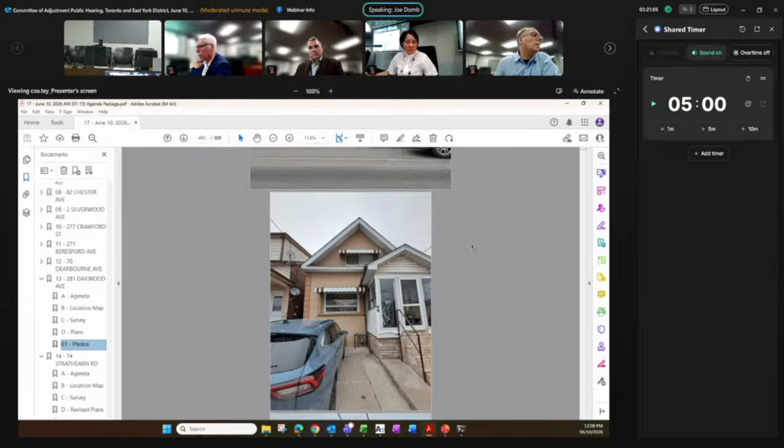To your request, I believe the owner would be open to including 2 4-foot by 2-foot planters at the front, which may help mitigate impact. Also, note the eaves for the main roof do drain to the rear yard. Would you be okay if we put the condition for the 2 planters? Yes, exactly as described. They will just locate it on the side or something.

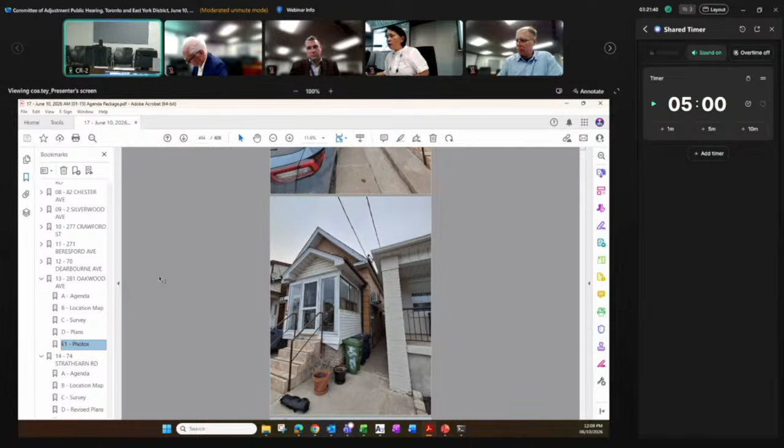Any other questions? We do not have any more. Now we are in committee. Mr. Dillon? I'm happy. It's basically just rebuilding an existing thing, so I'm happy to approve it. But I do think there's an opportunity to add a little bit of soft landscaping, so I will add the condition as described by the agent that they will add 2 2-by-4 foot planters in the front. I'll second that.

May I clarify that perhaps we should use the metric? 600 by 1.2 meters by 0.6 meters. That makes sense, I can support this. If you look at the east side of Oakwood, many of the properties are lacking in soft front yard landscaping, as opposed to the north or west side, which is a bit different. But I will second that motion, with the conditions.

All in favor? All in favor with the conditions, with the planter condition? All in favor? It's approved. Thank you very much.

The next item is 74 Strathearn Road. This is to alter an existing two-story detached dwelling by constructing a front two-story addition and a rear one-story addition, which is an open-air pavilion. We received a survey, site plan, floor plan, elevations, revised site plan, floor plan, elevations, 5 photographs, and a cover letter from the agent, plus the decision affecting the property and an arborist report. We received comments from Urban Forestry and 12 form letters in support from Strathearn Road, Glen Cedar, and Markdale Road.

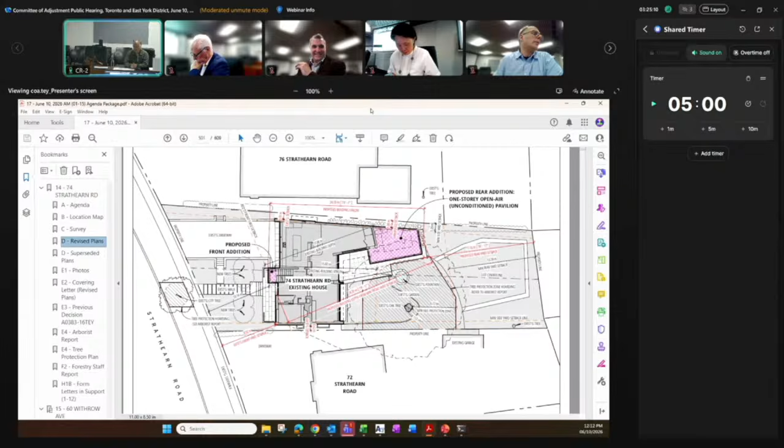Well, we're not in committee yet. Anyone else, more comment? Do we have a motion? I'm happy to make a motion. Although the length and depth is considerable, it is a very deep lot, and it's really restricted to just one part of the garden.

So it's just a fairly modest addition. I think it's appropriate for the area and effectively minor. I just would like to put a condition tied to site plan and elevations, just to make sure it's really just for that new construction and doesn't create any other issues. It's an irregular building on an irregular site, so the setbacks and all trigger bigger numbers. Exactly, yeah, please.

Urban forestry condition number 2. Yes, that's a forestry condition.

I'll second that, but I just want to add, the siting of that room to avoid the tree, to avoid negative impacts on the trees, is really smart, and I think it's just going to be a lovely room to be in.

So we do have a second, Peter seconded with the forestry condition, no other conditions, all in favor? All in favor, thank you, unanimously approved. Thank you for coming, everyone.

And the next item is 15, 60 Withrow Avenue. This is to propose altering the existing 2.5-story semi-detached by constructing a 3rd floor east side dormer, and there's also a rear 1st-story addition.